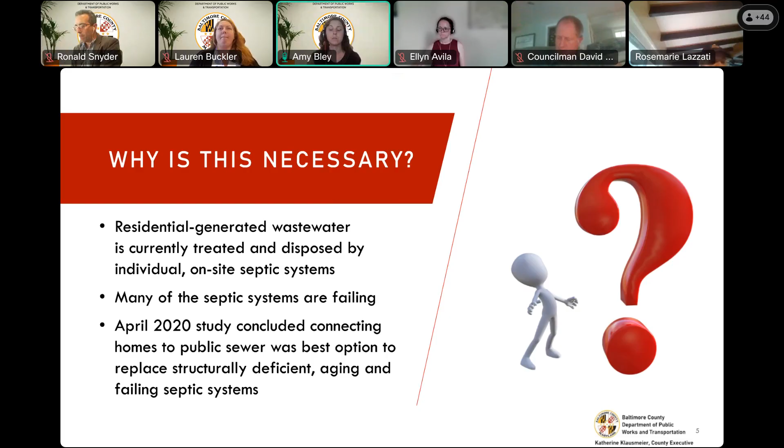So an update on the sewage pumping station that I'm sure you all saw via the mailer. The county has not been able to secure a location for the sewage pump station, which was critical to the original design. This has led us to look at multiple other options to see what the best engineering option was to be able to provide the community with public sewer.

The pump station was initially proposed to take advantage of a gravity system as much as possible. That is Baltimore County's preference, is always to use gravity. It does require less maintenance, and we try to make that work whenever possible. Unfortunately, that does not seem to be the case here, so we are transitioning to a new low pressure system design.

This means that every participating home will have a grinder pump located on site. It eliminates the need for the pump station, and this also allows us to move forward quickly without acquiring additional property. All of the grinder pumps will be installed, owned, and maintained by Baltimore County.

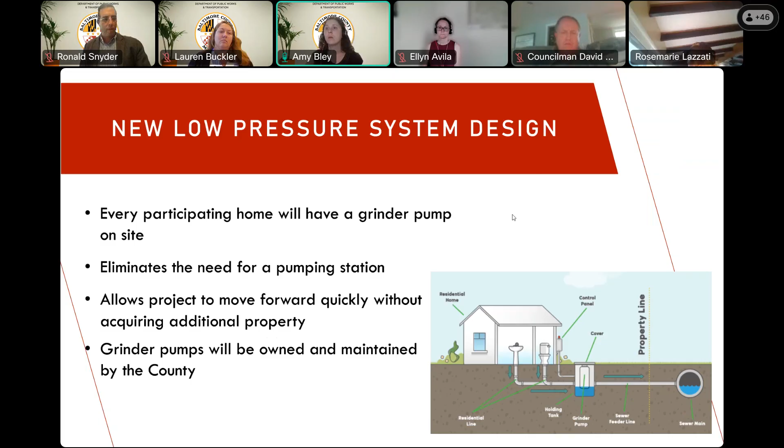I will also add that the system is being designed currently to accommodate all existing properties as well as current vacant lots, with the caveat that the system will still function with the current number of connections applied. So what I mean by that is if factoring in the current vacant lots requires an upsize of a pipe or a change to the design that will not function well with the current connections, we will not sacrifice your current functionality to accommodate future builds on those vacant lots.

So what is a grinder pump? Let's answer your question. A grinder pump is a submersible pump included in a watertight tank. So again, all of your sewage and wastewater from your house will drain by gravity into the grinder pump. It will grind up the solids and pump it into the main sewer pressure system until we are able to reach the gravity system. So I have some examples up here.

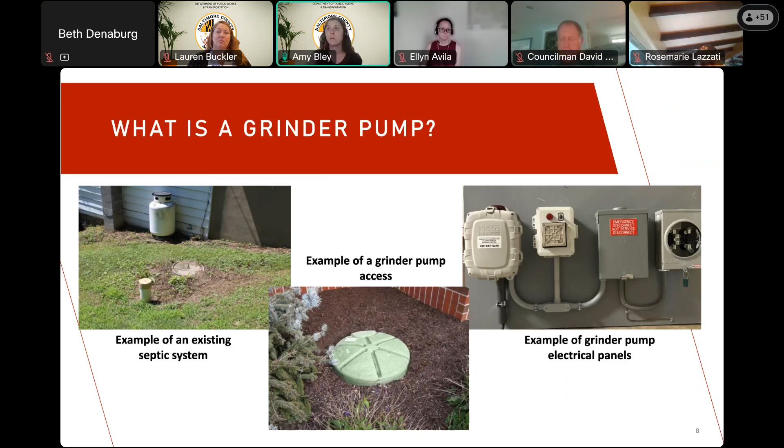As far as community impacts, the county contractor will be installing the main within the roadway, and the county contractor will also be installing the grinder pumps and all the electrical requirements needed for the pump. This means if electrical upgrades are required for your particular residence, that will be included in the project as part of the connection cost, and the contractor will take care of that for you.

The property owner is responsible for connecting the house to the grinder pump, and interruptions to your service should only occur while the plumber is connecting your house to the grinder.

Sorry, want to repeat some of the things you just said because there are questions coming in about them at the same time.

So as Amy just said, the county contractor installs the grinder pump, not the homeowner's plumber. The county contractor installs the grinder pump. The electrical upgrade is installed by the county contractor if you need one, not your contractor, county contractor.

So again, from the image, you can see this is a profile of the plumbing leaving your house, entering the grinder pump. There is a shutoff valve that will be located so that if your grinder pump needs serviced, we can isolate it. And then there is a connection to the main.

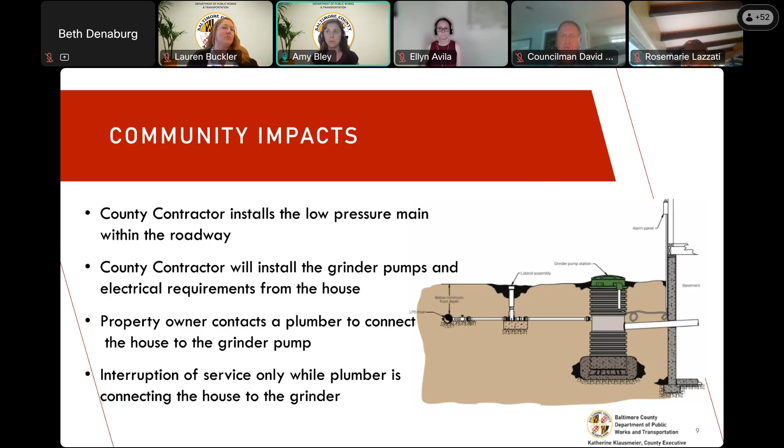Next slide, please. As far as project timeline, we're looking at our permitting being wrapped up around the end of this calendar year, with our design completed in spring of 2026. We should be able to advertise the project for construction in the summer of 2026, with award expected in fall of 2026 and construction completion in spring of 2028.

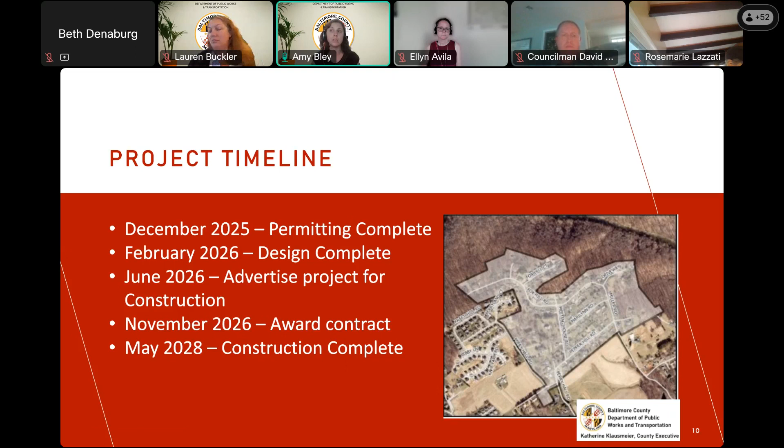Next slide, please, Beth. And I'm going to turn it over now to Ellyn, who's going to talk about our costs and funds. Thanks, Amy.

So the overall costs for the project, the estimated, it will increase from the estimated notice of assessment provided in 2022. We don't have those estimates yet since the design isn't yet complete, but once we do, we will send the owners a letter outlining your costs.

The state funds for this project of $4.5 million are available for us and they are secure. These funds will be going towards the property owner's share of the costs. Since the connection costs are higher than anticipated and the design is being reworked, we are allowing new connections. The deadline for anyone who's not yet opted into the project is November 1st.

To review the benefits of connecting, I know we went over this a couple years ago, but a refresher here, especially for the grinder pumps. As Amy said, the benefit is if you connect with the project, the county maintains the grinder pump. The benefit is you have the benefit of the state funds, which will reduce the cost to connect.

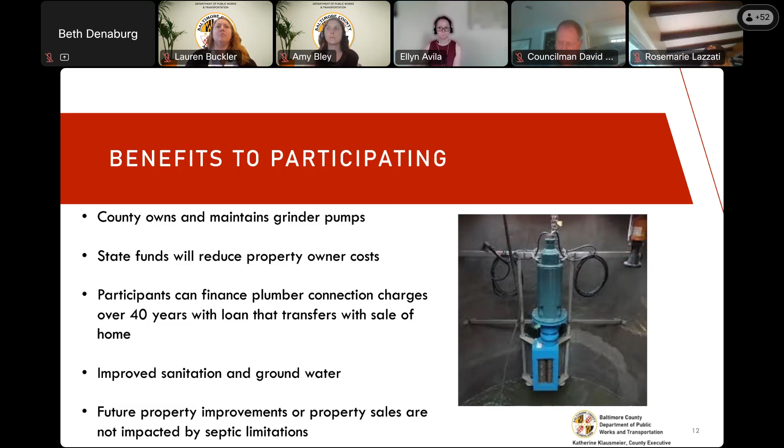All right, I want to review some next steps and call out some things that you all need to look out for.

I have a question. This is Bob Swiderski. Can we take some time and go back to the questions that were asked and maybe answer them before we get to the next steps? Can we please get through the presentation first and then finish up with questions? We're almost done. We've got one more slide, Bob, and then the rest of the time will be for questions. All right, I just want to make sure the questions don't get missed. Understood, thank you.

So the next step in our process that directly impacts you all is we will be sending out right of entry agreements. So please be on the lookout for those. This is an agreement that you sign that allows us to get onto your property to do the work.

It will be followed up with an easement purchase at the end. But again, if you do not sign this now, we are delayed in completing the project. So your assistance in signing and returning promptly is greatly appreciated.

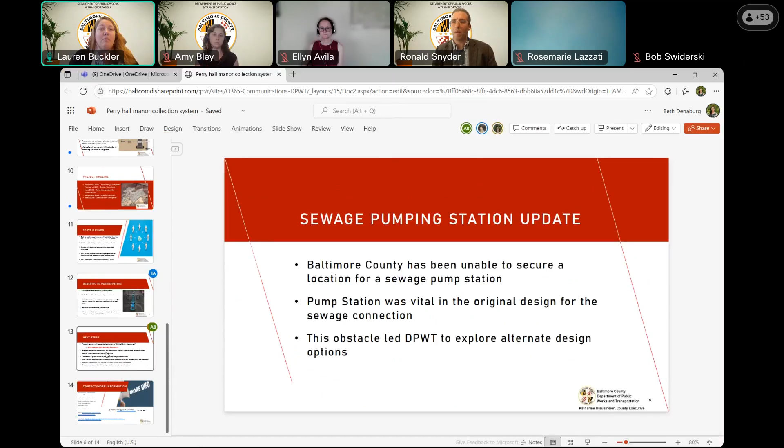One of the questions is, was the mansion considered for the pumping station? The mansion was looked at. There were a couple questions about properties looked at in general that we got in writing and that are coming through in the chat box. We did look at multiple properties. Some of them were not applicable because of the geography. The mansion is one of them. It doesn't work for the way that the flow needs to come to the site, the pumps, and gravity. So the mansion was never a viable option, but we did look at it.

We looked at several other sites. We did try to negotiate with several property owners. We were unable to reach an agreement with the property owners. I just want to be really clear about that. It wasn't because of a lack of trying on the county side, on the staff side that are on this call. There was a lot of outreach done, a lot of work done to try to secure properties. At the end of the day, these are private properties and they have a choice in the matter. So they made the choice not to sell to the county.

There wasn't a dollar amount that was offered on their side that the county refused to meet. There was just never a dollar amount that they were willing to consider on all the properties that we tried to negotiate with. There were multiple properties. We're not going to provide the information on what those are and all the details that went on there, but it didn't work out.

It's been a long time now. We're trying to move the project forward. This is the way that we can move the project forward, is with these grinder pumps.

I know there's a lot of questions on cost. We wanted to get this information out to people sooner rather than later. We don't have every piece of information at this point, but we didn't want to sit on this and not tell you until we had every piece of information. This is why we sent the letter out, letting you know that this has changed, letting you know that we're going to have this meeting to give you the information that we do have at this point.

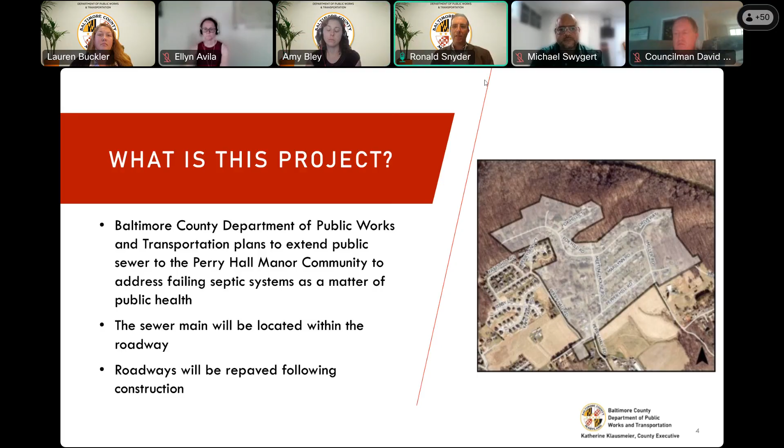We're also getting a lot of questions about what would happen with the current septic tanks on those properties. Will they be removed, or how would that be addressed? As far as I know, that is up to you and your plumber. I believe they can be abandoned in place, but I am not certain of that. So that is something I can look into and get back to you all on.

Yeah, and that's a good point, Amy. Anything we aren't able to address or aren't sure of, we will follow up on. Will the grinder pumps have sensors? Grinder pumps have alarm systems on them. With follow-up, in terms of the septic, we'll take care of making sure it can be removed from the system.

I think we had a glitch there in technology. I lost my train of thought on what that other question was. Ron, I'll defer to you on what question you were answering. I'm going back to look because we've had a couple of overlaps here. So one second, because mine just glitched too.